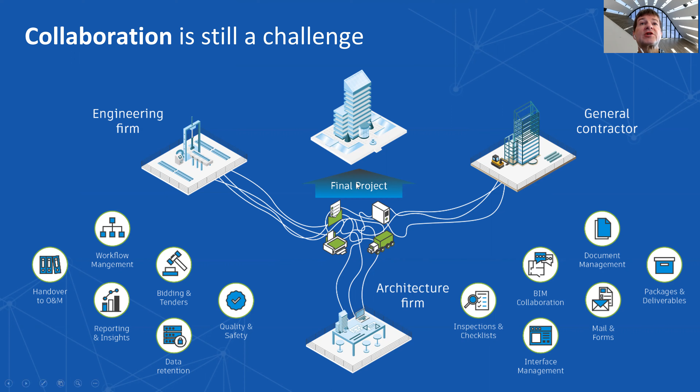I'm not going into many details right now, but it's important to realize how much rework people can save if they can collaborate on the latest data. So I will start with the architecture of BIM 360.

What we have are project data. Project data is stored in the cloud and people can access it. It's not only storage - I'll come to that later - but you should realize it's also storage with important functionality which enables architecture and engineering companies to truly collaborate.

On top of this, we have different modules. We have a module for design, dedicated to designing companies, making design and enabling true collaboration on the project. Then we have a module for pre-construction, where people can check clash detection and coordinate the project between different teams to create what we call an error-free model.

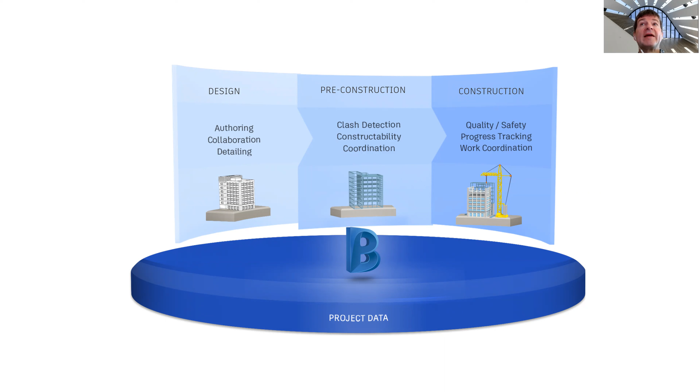And we have a module for construction, where the construction company can gather information from the construction site, analyze it, and proceed with construction much faster, as well as learn for future projects. What's also important is that these tools are really connected with our products.

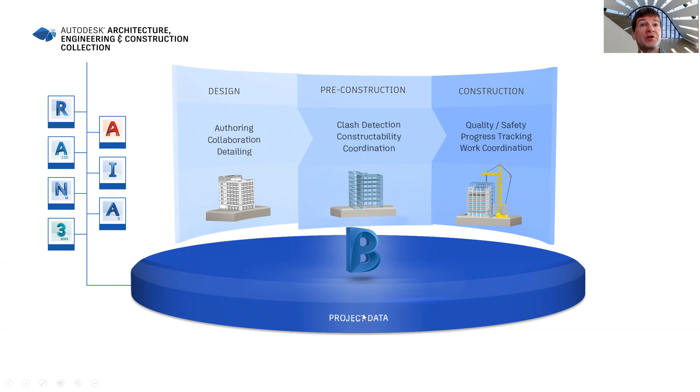So at the very bottom level, we can connect any of our tools with project data, basically with the cloud, using what we call the Desktop Connector, which is part of this solution for project data.

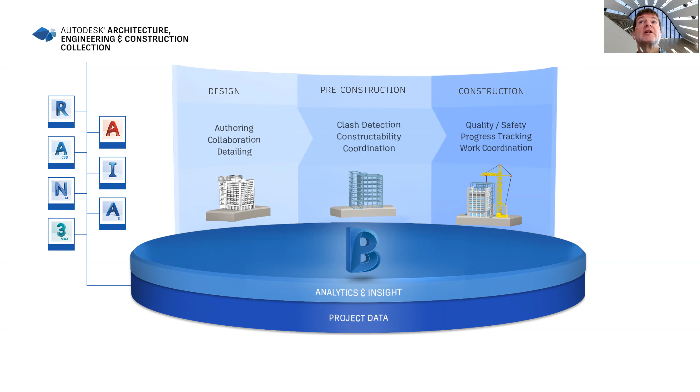On top of this, what we can also offer to our customers is analytics, analysis, and insight into the project. What does it mean? For example, a manager can have a quick view of what's happening with the project, where they stand, if there are delays, if people are working well and on time, and if subcontractors are in delay with responses and so forth.

And what we also have is Autodesk Forge. Autodesk Forge is an API, basically a programming interface, where third parties can collaborate and create their own applications on top of the data in the cloud. This is something we believe in at Autodesk - why we are successful is not only because we have a state-of-the-art solution, but also because we enable third parties to create their own solutions on top of our solution.

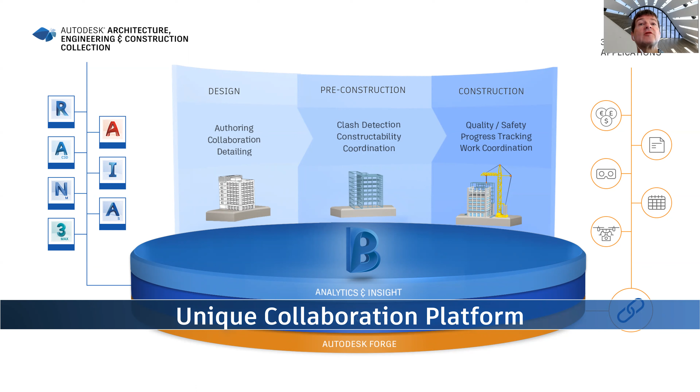So really, what we believe is we are offering a unique collaboration platform for the entire life cycle of the project and for many different teams. Let's have a look at how it's constructed, what the solutions are. The project data, the basic module, is called BIM 360 Docs. The designing piece, the designing module, is called BIM 360 Design.

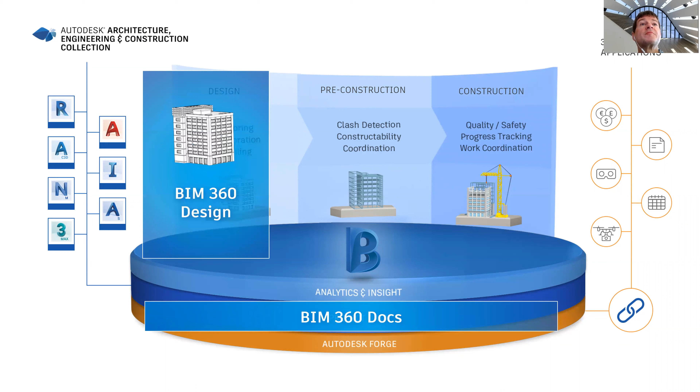Module for pre-construction is called BIM 360 Coordinate, and the part or module for construction companies is called BIM 360 Build.

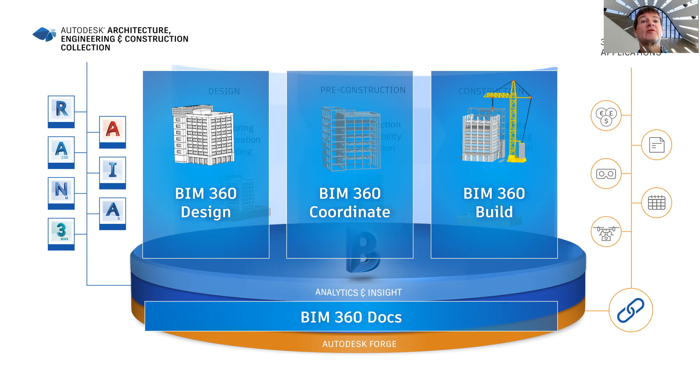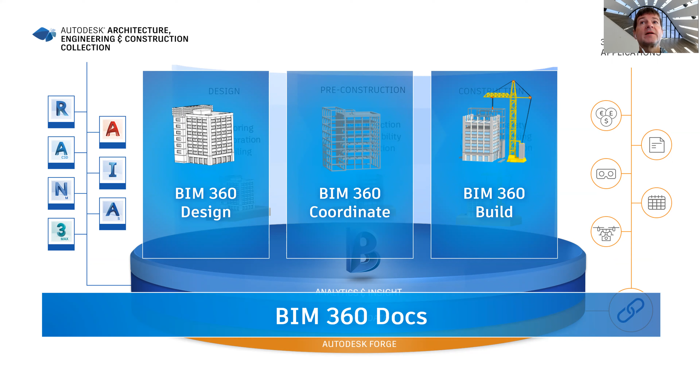The goal now is to talk more about BIM 360 Docs, the platform mentioned in the topic of this webinar. Let's have a look at what BIM 360 Docs can offer. As I mentioned, it's not only storage, but storage with many different functionality. I'll introduce some of them quickly, then go deeper.

What we are supporting is not only 2D but also 3D, so basically many different formats - more than 60 different file formats. We can help you view them without installation of any software, and you can see not only what's inside these files but also embedded data, meaning any properties or attributes attached to the object defined by design.

What we can also do is versioning. If you are storing a new version of the model or drawing into the cloud, we keep the previous versions as well. So you can very easily do change management - you can compare either drawings or 3D models, and see what has been created, added, deleted, modified, and so on.

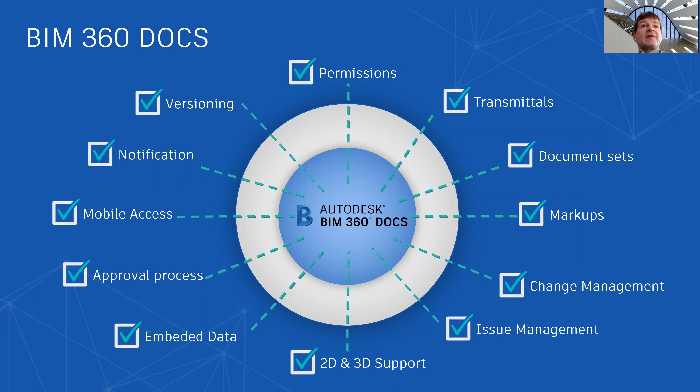So that was very quickly what's happening inside BIM 360 Docs, let's have a look in more detail about the functionality. If we are talking about common data environment, important are permissions - you can define different permissions for the folders, with a very easy user interface.

This works either for users, or even for roles, because everybody can be assigned a role, and you can define the role permissions or even company permissions, which is much easier later on for management, for IT management of the project. We have different levels, from viewing only, where people can only view the model, up to full control, full access rights, for example for the administrator. So there is a wide variety of permissions which can be defined to people, roles, or companies.

What is also important is the file structure. It's definable by the administrator, who will define this folder structure. This folder structure can be unified across the project - what they can do is create a template, copy the template, which will create not only the structure but also inherit the different permissions to the folders and so on.

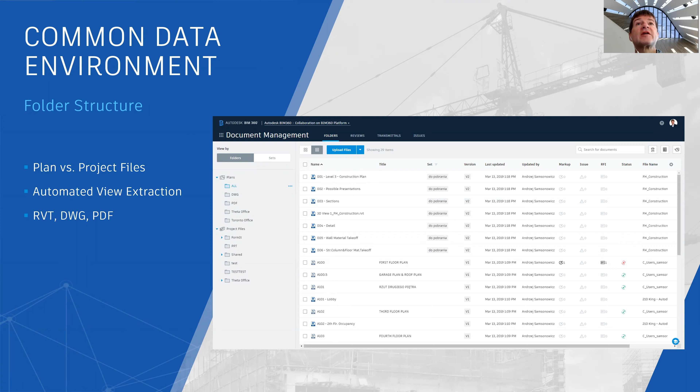So what we are also supporting, as I already mentioned, is either 2D or 3D model. And if you are working with a Revit file, for example, then these views are really connected. So basically, you know what's happening in 2D or 3D, and you can view it at the same time.

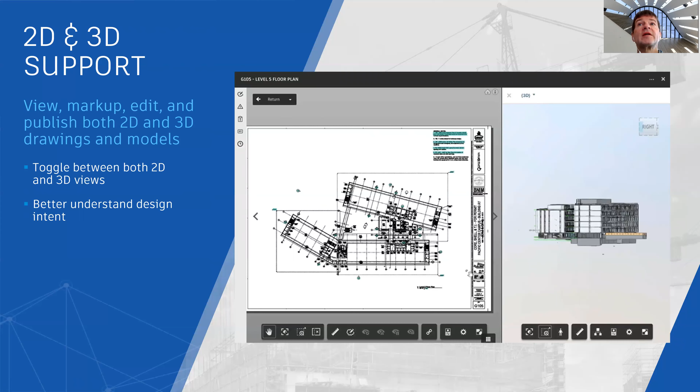What is important, as I already mentioned, is that you have more than 60 different formats which we are supporting. And it's not only Autodesk formats. We are also supporting exchange formats like IFC, and where it's possible, we support the formats of our competitors, like, for example, DGN.

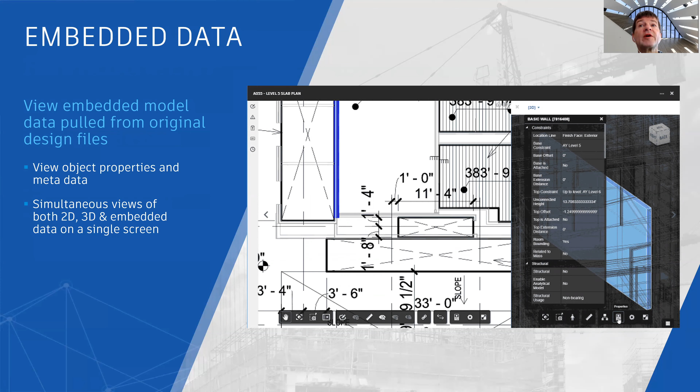And I already mentioned as well that we are supporting embedded data. So basically, each object is connected with some attributes, and these attributes can be viewed within the web browser. It's important to mention that at this point we are working in web browser, so all the data can be viewed by even a non-designer. You don't need to have Revit or AutoCAD, whatever the file format is, but as we are enabling viewing of the files, you can access all information available.

I also mentioned that you can start to work with markups. So you can put a markup on the drawing, and the markup can be either private or public. It can be only for you, or it can be publicly available for people. And you can view who created it, when it was created, and so on. You can do this on a 2D model or 3D model, it's really up to you wherever you want to do this.

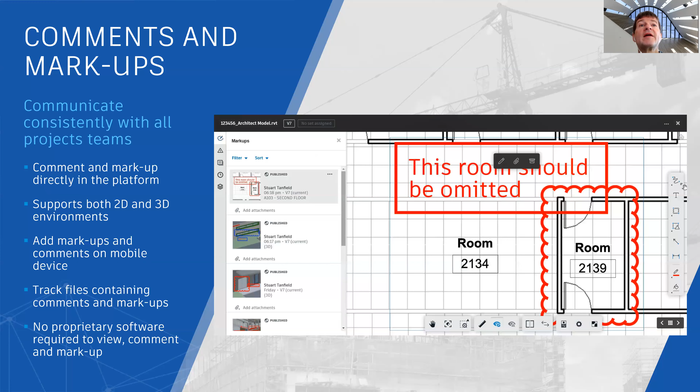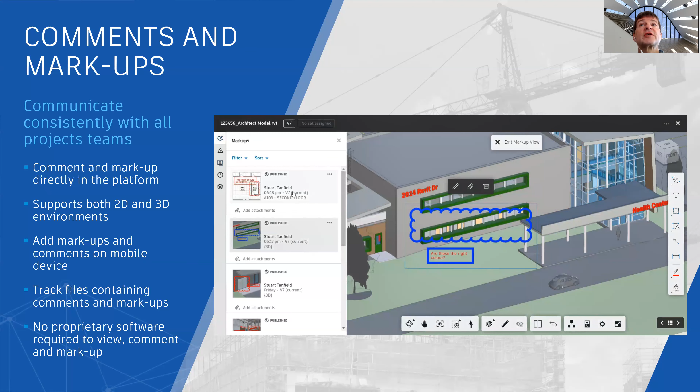And of course, you can later on track what's happening, who did it, why did it, and then at the end you can close it. You can attach more information to the markup that is available for later use. And these files can be stored in the cloud, and then it's available for everybody.

If you are talking about markups, this is what I call non-addressable. So basically, you are making a markup, and it's for you or for everybody, but nobody will receive a notification. While if we are talking about issues, this is what I call addressable. So you will define who is the owner, and who you are assigning it to, which means that if you are assigning to somebody, the person, role, or company will automatically receive an email notification.

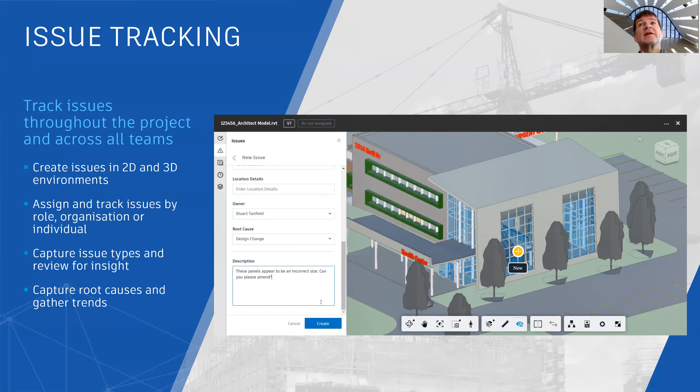That some issue has been assigned to them. You can also define a due date, which is the date when the person has to react to your issue, and if not, inside the module it will be visible in red that these guys didn't reply in a timely manner. And of course it has an entire life cycle, different statuses, so it can be created and then answered, and at the end of the day you can archive these issues.

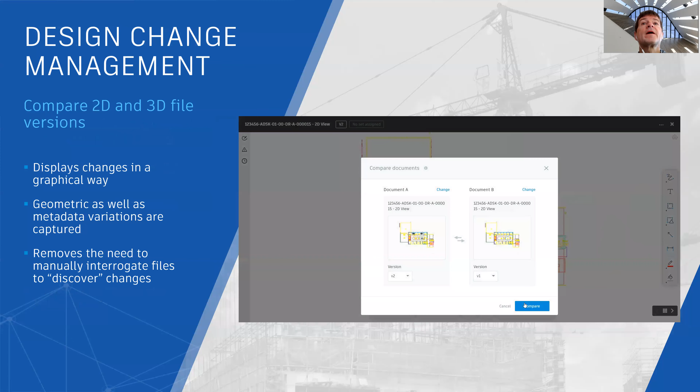As I mentioned, we are creating different versions. So as soon as you are storing a new file, it can be 2D or 3D model, we are creating a new version, and they can compare. You can compare different versions, so basically you can see what the changes are.

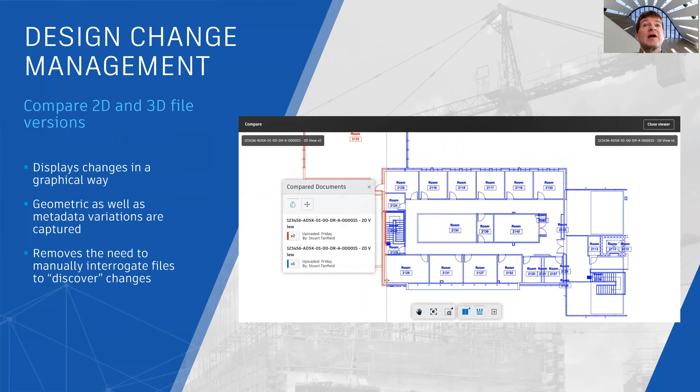And of course, if we are talking about 2D, it's not very clever, so you can make some overlay, and then you can visually compare it. While if we are talking about a 3D intelligent BIM model, then the system can recognize what has been added, what has been removed, or what has been modified, and you can see the differences between two versions.

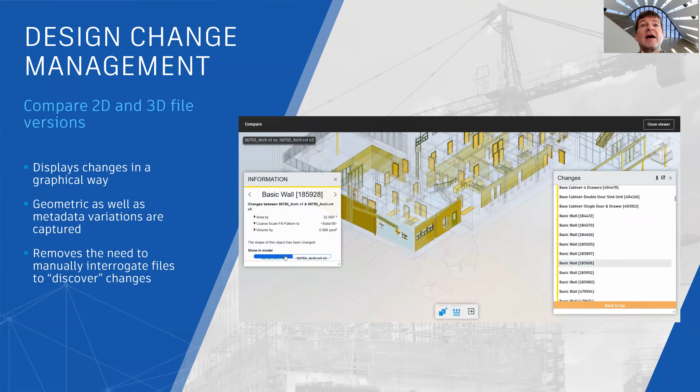For example, which windows have been added, deleted, or modified. It doesn't have to really be moved, only if you change attributes, then the system will recognize it's modified, and you can very easily see what the modifications are without having any Revit installed on your machine. You can compare Revit files this way, for example.

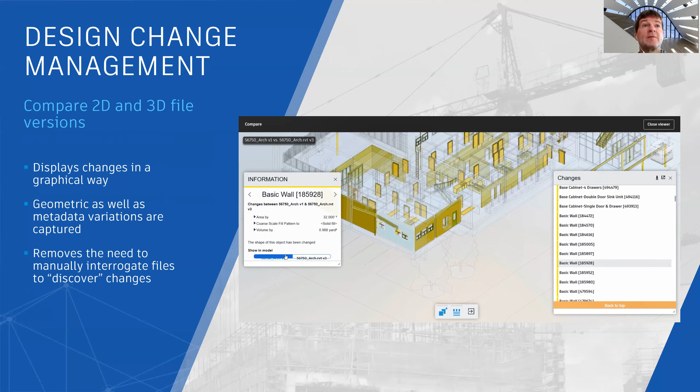Approval process is another very useful functionality available in this basic BIM 360 Docs module. So as an admin you can set up an approval process, it can be a 1 step, 2 step, or 3 step approval process, and then a user can initialize the reviewing process. He will select from predefined approval processes, and he can work with one file or many files, and then send this set of files or one file to the approval.

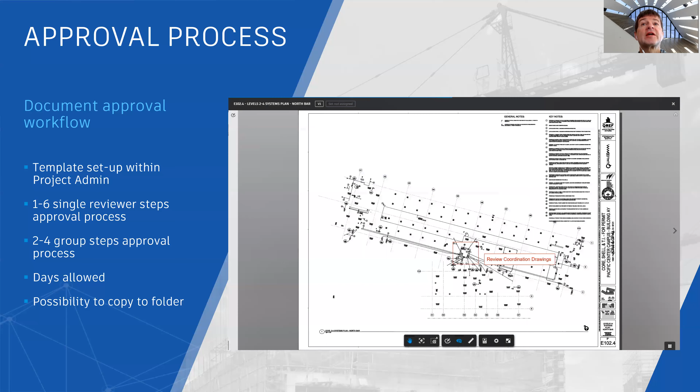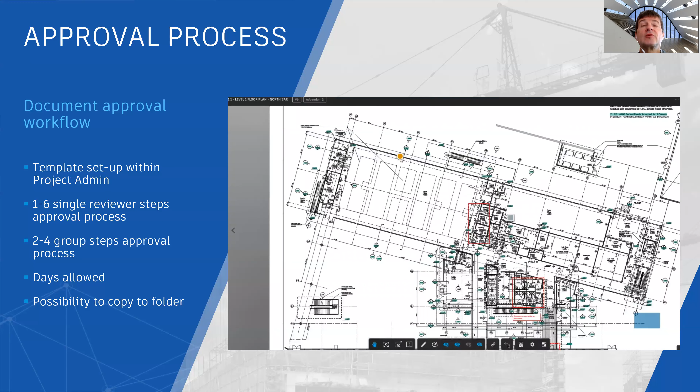Which later on can approve it or reject it, and then all the answers are visible in the system. It is approved or not, and why not. He can add notes, he can put issues, and basically he can use any available functionality to communicate why he approved it, or better said, why he didn't approve that model or file, back to the initiator.

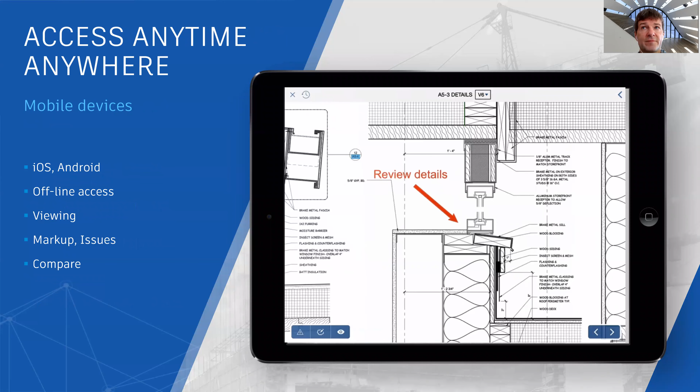Using BIM 360, because it's a cloud solution, it can be available anytime, anywhere, which means it can be available on your mobile device. We are supporting iOS and Android, and you can take all files to the field and work with this.

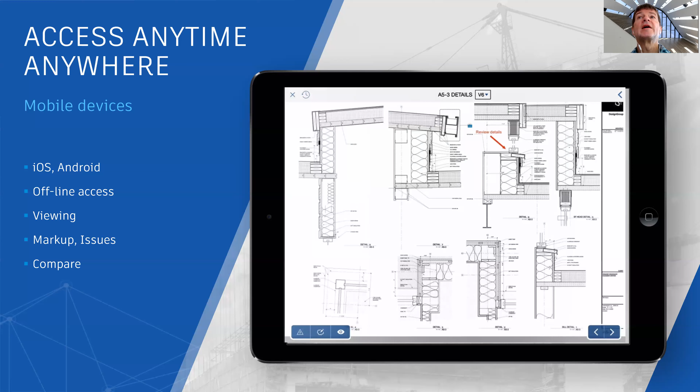What is also important to mention is that we can work offline. You can pre-download files which you think will be needed on the construction site, and then without a good connection, you can work with these files on site. Later, when you come back to the office where there is good internet, you can synchronize it. But of course, if you have a good connection on the construction site, no problem to have all information online and available on your mobile device.

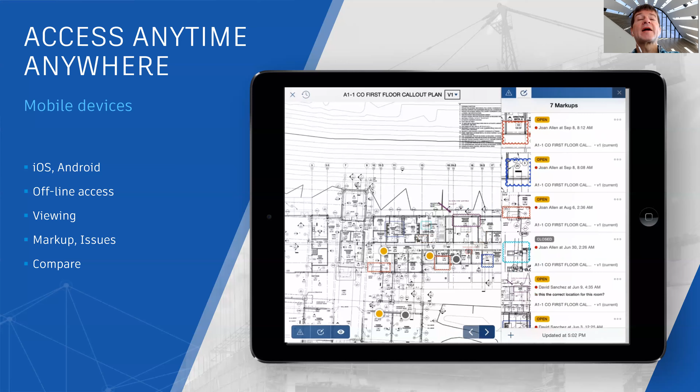You can create markups, you can create issues, you can compare the model. So basically, you have selected functionality available on your mobile device, and you can work with this.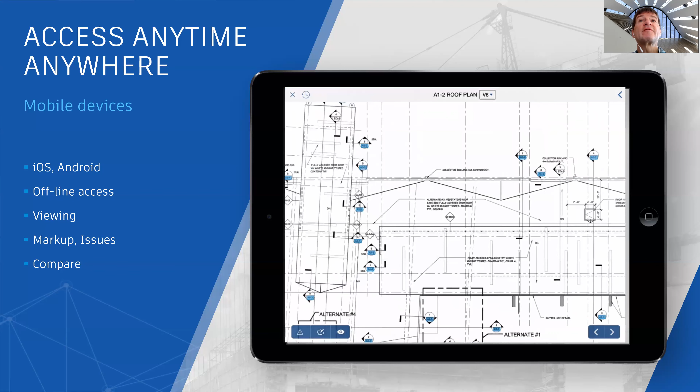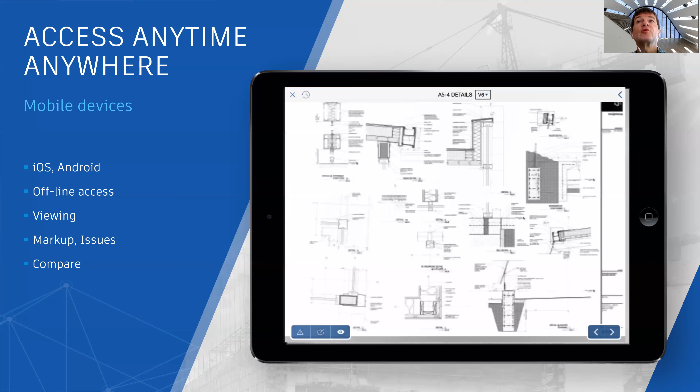I'm usually talking about DWG files or Revit files, but imagine that you can store any engineering file. It can be PDF, it can be a Word document, it can be just a picture from the construction site. All this information can be stored and viewed on our platform for later use.

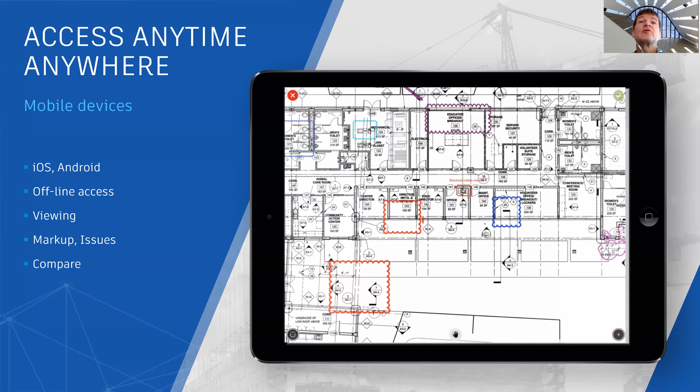And you can basically link different files together to have a really clear understanding when you made a picture that is related to this issue, related to this project, to this model, to this file, and so on. So it's really up to you how you will link files together.

What is also important to mention, because we receive a lot of questions, is what about security? What will happen if the system doesn't work, and so on. We want to be as transparent as possible, so we have a health dashboard available for any customer. You can see for different services what the current status is, and you can also see the entire history. If there is any issue, we clearly mark it up.

You can see what's happening, and it's not secret - you can just type 'health dashboard Autodesk' and see what the history was of any available module or cloud service. If there is some inconsistency in the history, or it doesn't work, it's usually due to scheduled maintenance, which is clearly communicated, and you can see that a service maybe wasn't available or was degraded for 10 minutes.

We also have a security white paper, because the system is certified for different ISOs and SOC certificates - you can see all of them. You can download the security white paper and see all the certifications. Basically, you can find a lot of information as far as security is concerned.